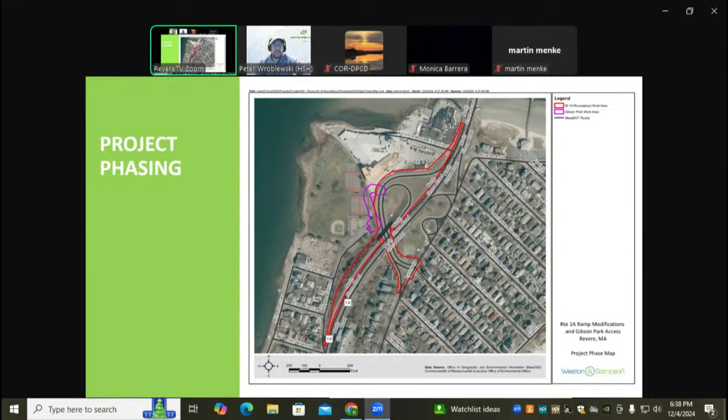This particular project is broken down into two phases. We have phase 1 outlined in red that compose the roundabout component of the proposed project. We also have phase 2, which is the Gibson Park access component of the project, which is outlined in purple. I will then turn it over to Peter, and he's going to give you a rundown on the phasing, and then we have some plan sheets to show you.

Thanks, Devin. Can everyone hear me okay? Yes. Okay, thank you. So phase 1, as Devin mentioned, that is the roundabout component of this project. 100% of that project is within the state right-of-way, and we've been coordinating very closely with MassDOT because it's all on their property to get their appropriate permits and go through their design process and environmental process to make sure we're meeting their standards, as well as MEPA's and everyone else in the area.

We previously submitted a combined set of plans, 75-100% set. We're considering that as 100% at this point, and we resubmitted that earlier this week. Phase 1 of this project, again, is just that roundabout infrastructure, and that's within the state right-of-way. And a secondary component of this project is critical to the access to the development at 22 Whitin, Gibson Point. There is a driveway which is going to be established as emergency access only for this phase of work.

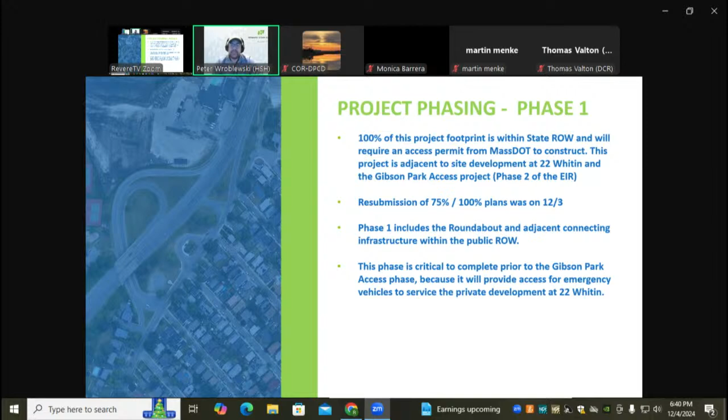If you go on the next slide. The second phase, this is Gibson Park access that Devin mentioned. We're approaching a preliminary design. We have those plans at, we're feeling confident, 75% design complete. We're waiting to file those officially until we get comments back on the content from phase 1 by MassDOT. However, the condition of those plans was submitted to MEPA in this filing, and your board will all have access to that. If you'd like to see those, they're available.

We did additional traffic studies on top of the functional design report that was included as part of phase one, which is a standard MassDOT traffic operational report. This was a subsequent report that MassDOT requested that we run to determine what, if any, impacts would come from building the access to Gibson Park and tying it into the roundabout. We did a full analysis with new traffic counts, and our report showed there would be no negative impacts to traffic volumes or safety in this area by connecting the roundabout to Gibson Park.

The alignment that you'll see soon in the next slides is the concept alternative that's preferred by all. I'm sorry, I'm still finishing up those last two bullets here, whoever's doing the slides for me. And there are a couple of concepts. Those concepts, we already know they're not viable, so we're not pursuing them any longer at this point, but we did go through an assessment of what was included in those concepts in terms of planting areas and number of trees and different environmental factors, as well as geometry and safety from a traffic operational standpoint.

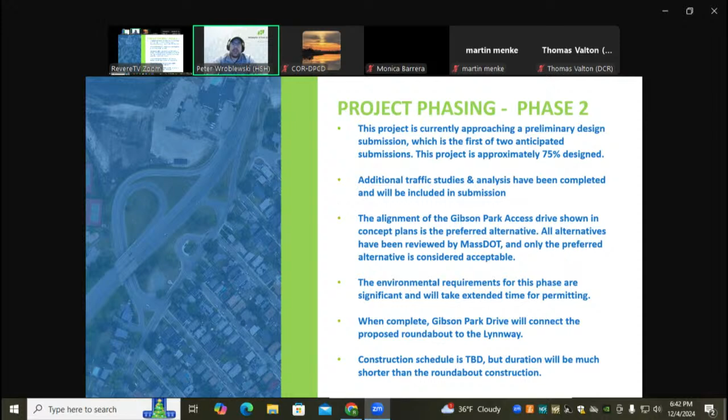It would be triggered by this action, and so in case that is what ends up, we're planning on that. We're counting on that being included, and if it ends up being the case, then this will take a lot longer to advertise this phase of work. However, the construction duration for this phase is significantly shorter than phase one. Phase one, we think it's about a 2-year construction period, and phase two, we think it's about a 2-month construction period. So there's a good chance that we could get this advertised and constructed in line with the phase one project. On the next slide.

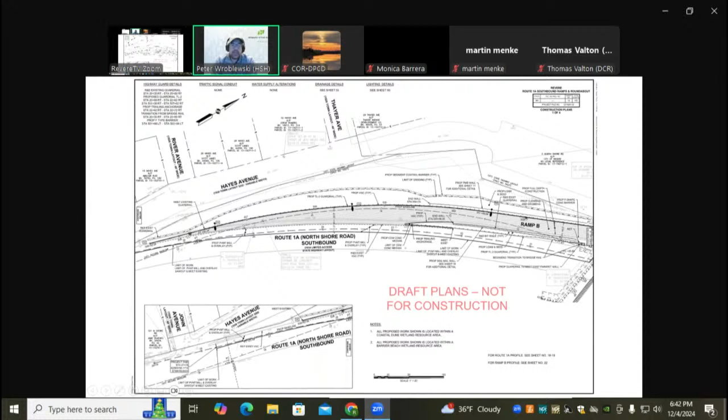So this is the first portion of our 100% plans for the phase one roundabout, and you can see this is the southern limit of the project. This is where it ties into Route 1A southbound. Our ramp B is a new on-ramp that, if you go to the next slide, you can kind of see it extends from that roundabout, which is in the center of Gibson Park, and then the 22 Whitin development, and then Route 1A are the three kind of boundaries that this tight roundabout fits within.

A lot of design went into this to meet these criteria. We had significant geometric limitations. We couldn't move it horizontally very far in any direction because we did not want to construct any roadway facilities within the limits of Gibson Park. We had vertical constraints because of the tight window to merge ramp B onto Route 1A southbound, limiting our ability to raise that ramp.

However, the Gibson Park Drive that you see on the bottom part of this diagram is the underpass under Route 1A, and we also couldn't raise that elevation because we didn't want to reduce the clearance for any trucks that might be using Gibson Park Drive. Many of you may know there's a subsequent large-scale project that MassDOT is undergoing with the General Edwards Bridge. We've been in coordination with that project group, and none of the work we're doing will be impacted by their project. We're going to make sure they can be concurrent. So that was another big consideration that led to this design option being selected.

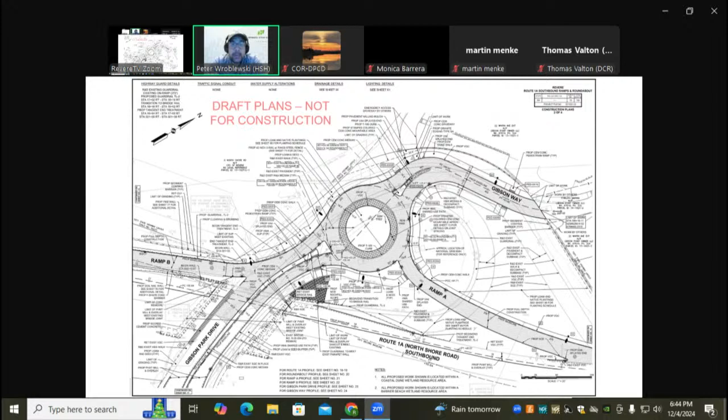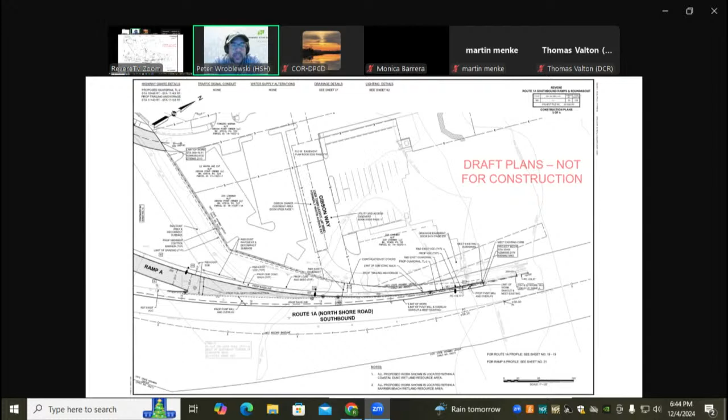And if you go to the next slide, that ramp A that continues, it's essentially going to be the same, slightly different, but the same beginning point for ramp A, which is the Route 1A southbound off ramp. And if you go backward one slide, and you can just kind of envision going down that ramp, you'll see that roundabout is the new intersection that connects all these points and ties into the Lynnway. And if you go forward a slide, this is the intersection at the Lynnway.

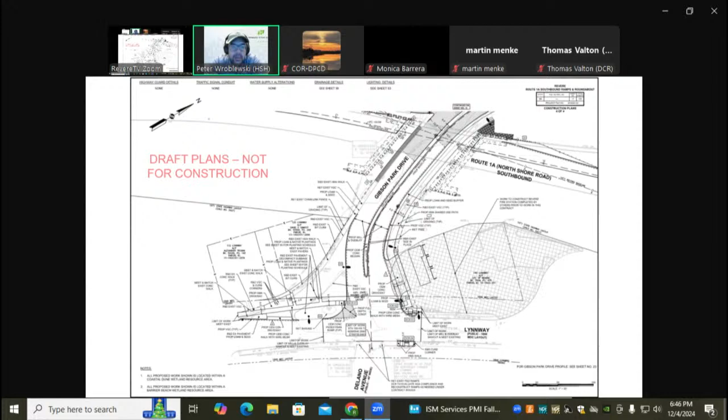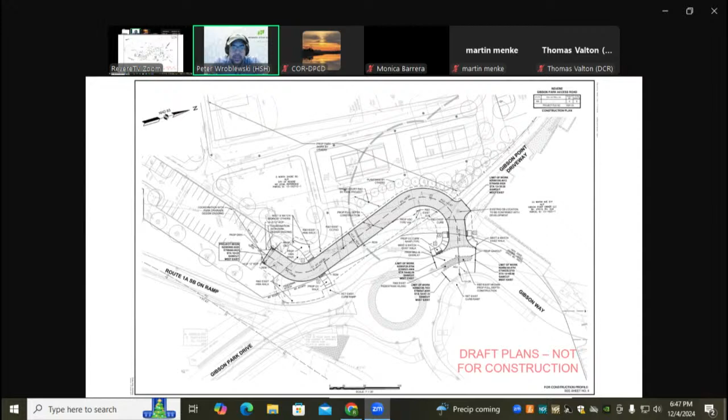On the next slide, you'll start to see some of the other alternatives that we considered.

So I kind of mentioned this, I don't want to be redundant here, forgive me. It does create a lot of access. The benefits of the roundabout are it creates this access, it's minimal traffic impact, and the shared use path is a nice new feature for multimodal accessibility. We showed you where that fire station is. The response time for emergency vehicles to get to this side of Route 1A and to residents on the other side is really critical. It reduces response time significantly compared to otherwise having to go into Lynn, pull a U-turn, and come back down the highway. Revere Fire Department has a brand new fire station and a brand new fire truck with a long 50-foot ladder. We got their truck details to make sure we coordinated with them that their big fire truck could navigate through our roundabout and make that access safely.

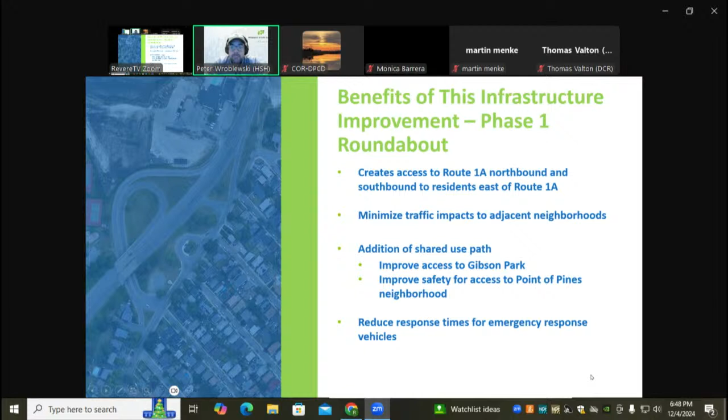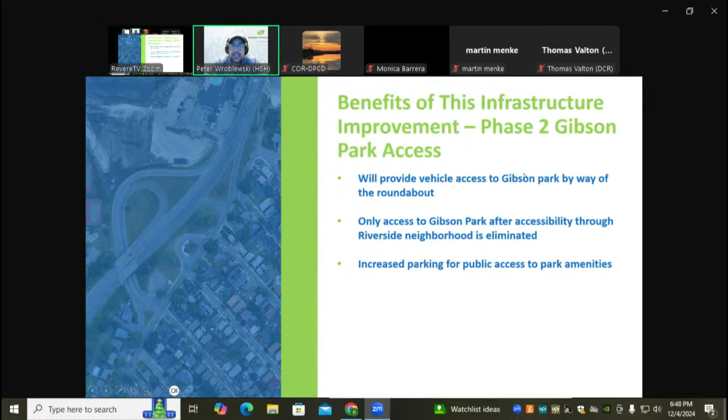Phase 2 - so this is again just continuing that access. As part of the Gibson Park Improvement Project, access to Gibson Park is planned to be closed off on the southern limit, and this will be the way that people can access the park. So it's a pretty critical feature.

Devin, if you want to go through the environmental impacts here. Thanks so much, Peter. So the three wetland resource areas that would be impacted as part of this proposed project are Barrier Beach, which is the entirety of the Point of Pines Peninsula, and similarly Coastal Dune - those two overlap, so any impacts to one will have equal impacts to the other. And then a good chunk of the areas within the 100-year floodplain. In this area, the 100-year floodplain is located at elevation 10, which encompasses most of the peninsula.

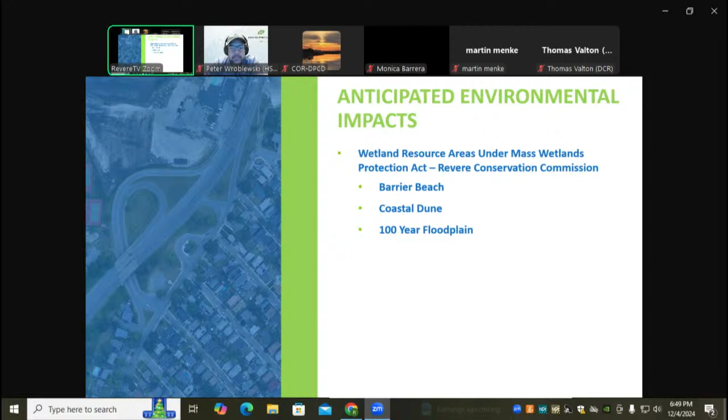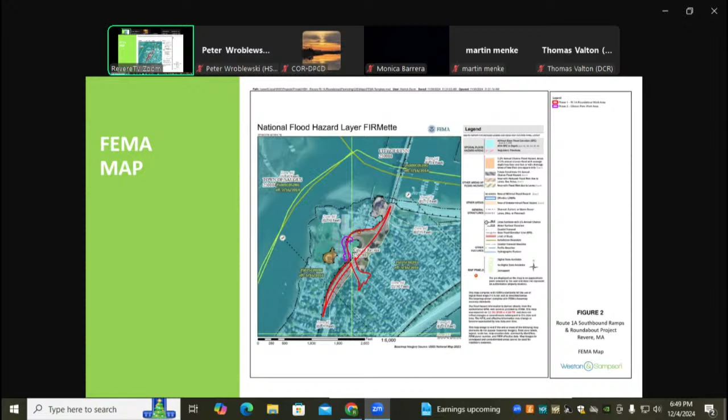If we could go to the next slide, please. This is the FEMA flood map to give you a general idea. It has been tweaked on the plan set to match real-world contours, but this is the map that FEMA provides just to give you an idea. So everything in light blue would be within the 100-year floodplain.

Next slide, if you'd please. This is a summary of the environmental impacts. We have it broken down into Phase 1, Phase 2, and cumulative. I'll just read through the totals that we're expecting for the cumulative, but happy to go through any of the others you may be interested in. For land subject to coastal storm flowage, we are anticipating a total impact of 86,390 square feet. For Barrier Beach and Coastal Dune, we are looking at a cumulative 207,114 square feet of impact.

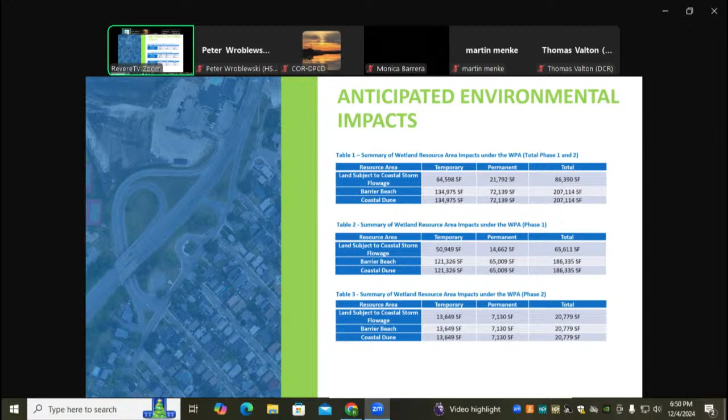One thing we had heard during our MEPA EENF submission from some of the agencies, including CZM, is they want to see benefits to the coastal dune. So something that has been incorporated as part of this EIR submission is just over 44,000 square feet of dune plantings. If we go to the next slide, you can see some of these areas highlighted where we're seeing dune planting. So where it used to be just kind of sparse grass adjacent to the highway layout, we're now going to have dune plantings.

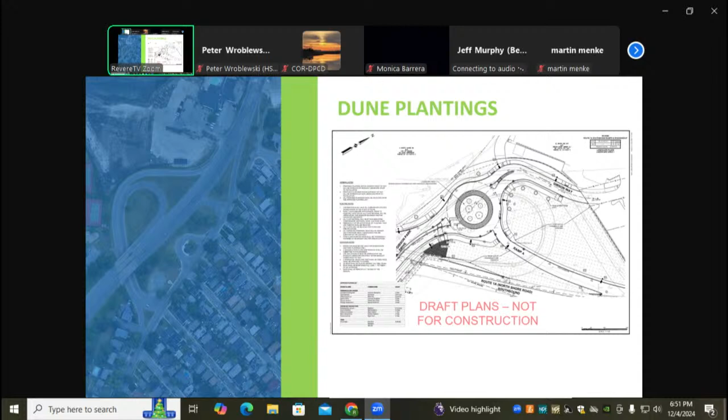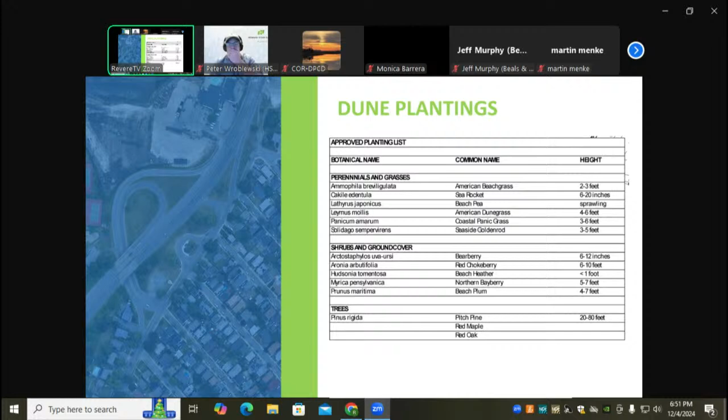If you go to the next slide, we've taken those planting lists from some of the CZM recommended lists so that we can have something representative of what the area would look like if we didn't have quite so much development—a little bit more of a natural dune situation to provide some nice stability to those exposed areas where it's a little sparse at the moment.

And then we'll play ping pong and I'll turn it back to Peter so he can talk a bit about traffic considerations. Thanks, Devin. So as I mentioned, the proposed roundabout is not going to increase traffic volumes on Route 1A. We've done a significant traffic analysis and used a background growth rate, compounded annually, to account for any developments in the area.

We coordinated with the city of Revere, but also with the city of Lynn, to talk about future developments. There was not a significant increase in traffic flow anticipated on Route 1A as a result of this new construction, either phase 1 or phase 2.

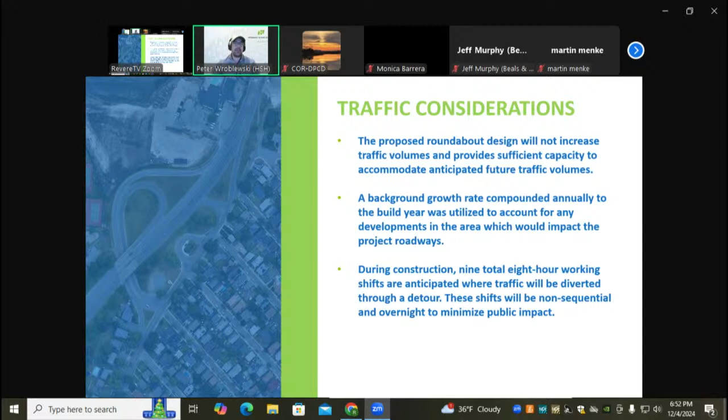In terms of traffic control during construction and the impact to the traveling public, there will be 9 total 8-hour work shifts where people will have to be diverted via detour, but those will be overnight and non-sequential—one night of road closure at a time. They'll typically start around 8 to 10 p.m., close the road for 8 hours to minimize impact, and try to offset each closure by at least a week or two so the traffic impact is minimized during construction.

Next slide. Now I'm going to talk about some of the alternatives we considered but did not pursue further for construction. The first is the 2 offset 3-way intersections. This was the most seriously considered alternative out of either phase 1 or phase 2. You can see it's very similar to the roundabout alternative, the main difference being that the roundabout alternative is a roundabout intersection, whereas this is 2 offset 3-way intersections.

From a geometric standpoint, this project fit in that area, but one reason it's not viable is that the on-ramp—it's tiny in this presentation, but envision the southbound on-ramp, ramp B, in that previous roundabout slide—requires an 8% grade, which is steep. To make an 8% grade acceptable for merging traffic, you need a certain length of taper. Because this road starts from a stop condition, that space isn't there within that geometry, as it is in the roundabout. The roundabout has sufficient room to make this work; the 2 offset 3-way intersection does not, so this is not a viable alternative.

We discussed this, analyzed it, provided a report, and discussed it with the city of Revere and the state. MassDOT agreed that this is not a reasonable alternative and therefore it was eliminated from consideration.

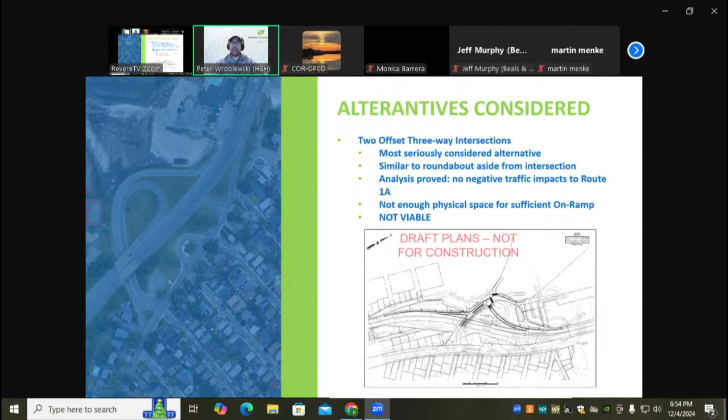On the next slide, I'll start to show some of the other alternatives we went through. I want to be clear on these: they are very preliminary concepts we're showing for transparency. They were not fully vetted or fully designed beyond the concept level, because they were determined to be invalid pretty early on.

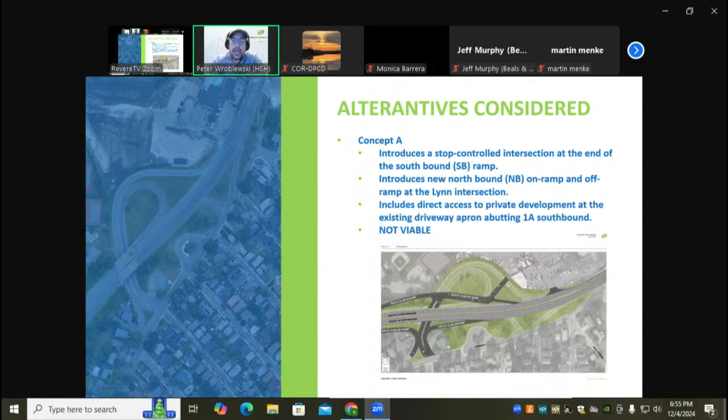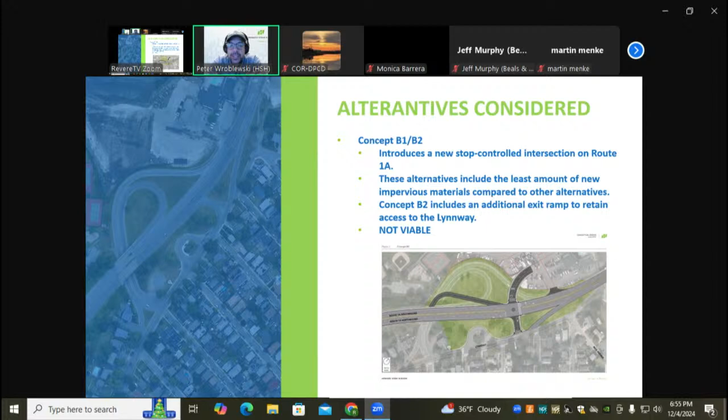And the next alternative—again, this includes a stop condition on the highway. If you click to the next slide, it's very similar, also including a stop condition on the highway with that off-ramp. We don't want to put a stop-controlled intersection in the middle of 1A, so this was pretty quickly eliminated as a consideration. If you go to the next slide.

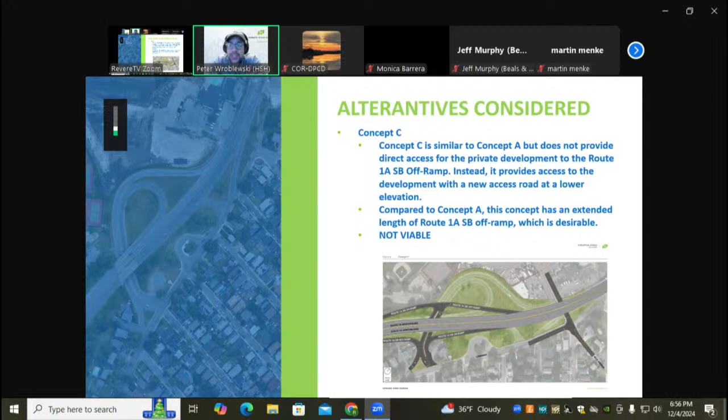On the next slide, this was pretty similar to the existing layout. I know this was an alternative that was favored by a lot of people, hopeful that it could be the selected concept. We pursued this with our design analysis and discussed it with MassDOT. This was not an acceptable alternative for a few reasons.

One, it does not provide emergency access into the building at that secondary entrance for Gibson Point. And secondly, the intersection required there, if you look at the off-ramp going onto Route 1A southbound, is a very short off-ramp, not enough stopping distance, which might result in some queuing on the highway.

Thirdly, MassDOT is not going to allow a condition where there's an intersection tying into a concentric on-ramp, off-ramp situation. It causes a lot of challenges for merging speed if you're accelerating from that stop condition, similar to what I talked about with the two offset three-way intersections. That's a challenge for traffic traveling southbound, and it's not a condition that allows for easy access—it would just create more congestion from that intersection. So this was also not a viable alternative, and we did not pursue the design beyond the concept level.

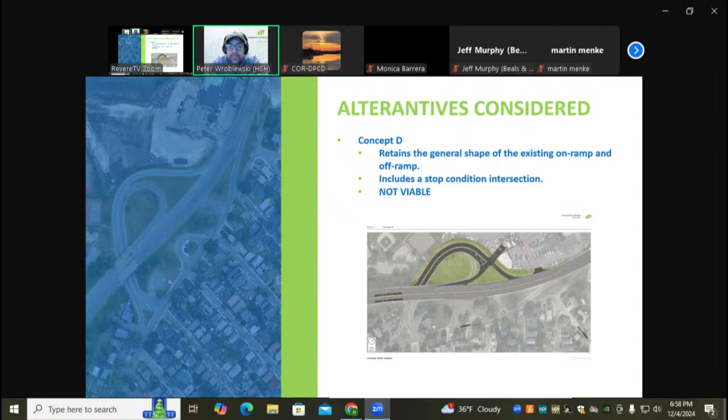On the next slide, I think Devin is going to go through some of the more design processes. Is that correct, Devin? Yeah, I can take it from here.

We're just about done, we've got about 2 slides left, but we just wanted to give— Thanks for your patience. Thanks, Peter. We just wanted to give folks an idea of where we are in the process.

To reiterate, we have already gone through the MEPA EENF process. On Monday, we submitted the SEIR. That will go into the environmental monitor on December 11th, at which time it will be available to be downloaded off the EEA website by anyone who so wishes. There's also a full copy that has been brought to the Revere Public Library for anyone that may want to look at it.

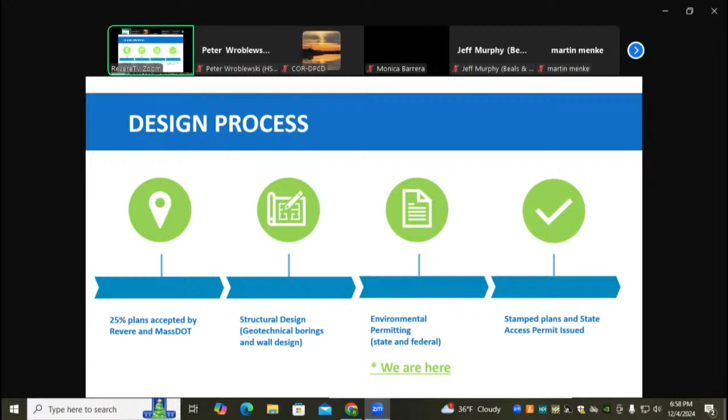If we could go to the next slide, please—just some more contact information for folks that may want to look at the materials, submit comments, or ask questions. We've got Julie's email address, as well as the website where this will be uploaded and posted December 11th when it goes live in the monitor. If you just search the EEA website for Route 1A, it's the only thing that comes up in Revere, so it should be pretty easy to find, and we welcome and encourage all comments.

And we'd love to turn it over for any questions that you folks or the public might have.

I would just make one small suggestion for the future. I know you said there's a copy at the Revere Public Library. I would highly recommend there being a copy for every single commissioner on this commission whenever you present. It was tough to see from here, and it was tough to follow.

So there's a copy of the actual SEIR at the Revere Public Library, the full report. We can send you the link for the SEIR after today's meeting, so you have it. It's a pretty large file. But we can send you a link for that, and we will have this on our project website under the community development page for anybody to look at, but we can send this to you as well.

I also want to note, because this is an environmental justice area, we have notified at least 7 or 8 different communities in that environmental justice population. There were mailers sent out to abutters of the project living within 1,000 feet. We're not required to do that—it's 300 feet from the project area—but we extended the limits, so residents living within that area received a notification of this filing. We're doing everything we can to make sure residents of Riverside and Point of Pines are fully aware about this notification and filing.

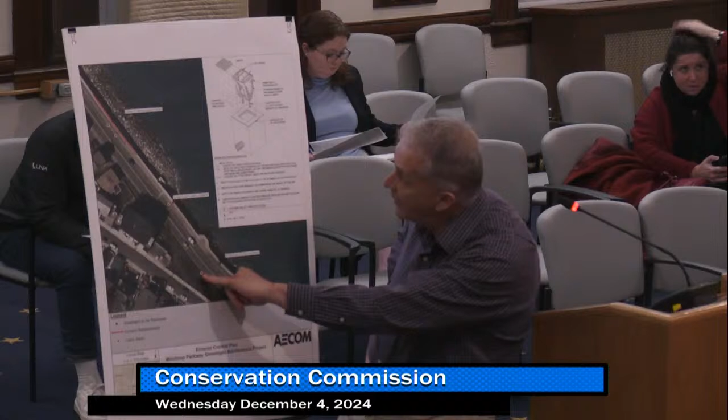Like I said, the work's all gonna take place in about a day. There'll be nothing stockpiled overnight. The only threat of erosion has a very simple solution: just don't work in the rain. And where a project's only gonna take one day, they don't plan to work in the rain. But just in case, we are gonna put silt sacks in the catch basins that are immediately adjacent. We have what's probably a 5.5 or 6 foot high wall separating the site from the ocean, so there's no threat of sediment getting into the ocean.

And then they have some repairs to do at the bases of the streetlights themselves. Which you won't have to excavate or do much with? No, we won't. It's in the buffer zone. And it is partially within land subject to coastal storm flowage, but because of the seawall, it's designated as an area with reduced threat of flooding.

So instead of excavating and putting it on the street, you can have like a dump truck or something like that you can load it into that can actually drive away, especially seeing as how you're gonna be taking it out. Yeah, so there'll be live loading, because the sidewalk's only this big. They don't want to go out into the street. That just creates a whole other list of hazards you just don't want to deal with.

Yeah, so they're looking to live load and keep traffic moving throughout the process. And like I said, it's a day for the excavation and the backfill. Then they'll be out doing the street light repairs there, the lamp post repairs. And I'm not sure, they might get 2 done in a day or 1 a day. Yeah, it is pretty dark going through that little stretch over there. I agree. Any questions from the commission?

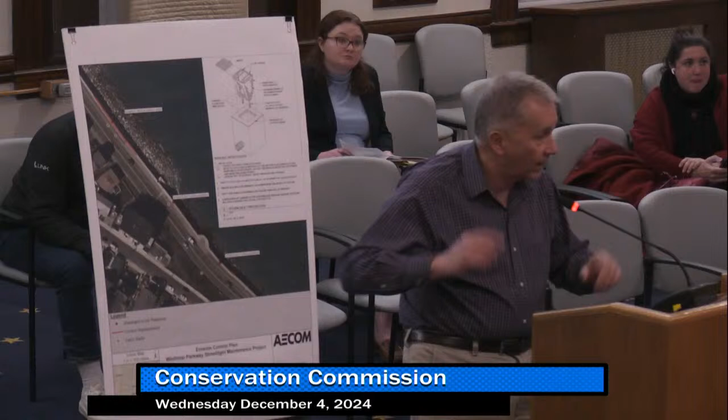Mr. Chairman, excuse me, hi. Yes, sir. Will this block either one of the travel lanes or car access? It will partially block one, but there'll be traffic that'll be allowed to pass. I assume there'll be a police detail there. There will, yes. Yeah, because that's kind of a bad turn there, it's a very busy roadway. You've got the seawall coming up too, that will reduce your visibility as you're trying to take a turn, so there will be adequate traffic control.

Thank you. I live one street over from that, so. Oh, you do? I use that road all the time to get to Winthrop, and it needs it badly. I'm wondering, how soon will that be completed? The very day they can. If it's not raining, the day they're authorized to go work, they're going out to work. Okay, great. Because I'll drive down there and just think, hey, this is really dark here. Why is that? So it's good to have this meeting and know why. Thank you. Any other questions?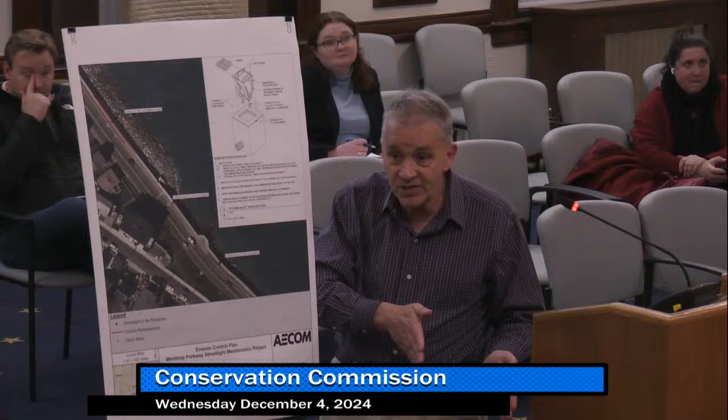Just to make sure it doesn't get done on a Thursday or Friday, just in case you run into problems, for the erosion control, so maybe like a Monday or Tuesday, so it doesn't extend into the weekend. If there are issues when they start digging, they can immediately just backfill that trench right away and compact and be fine with it and just walk away. It will not interfere with traffic on the roadway. It's only gonna be about that wide. So they'll be able to leave the silt sacks in for quite a length of time before they have to take those out and clean them. Okay, that's fair, thank you.

Any other questions? Are you requesting a negative determination? Yes, we are. Okay. Any questions from the audience about this? Nope. I mean, you are excavating, but because of the retaining wall, it is not going to impact, and you'll be live loading, so you won't really have dirt on the ground, and you'll have plenty of erosion controls. I would be fairly comfortable calling for a negative determination of applicability to the Wetlands Protection Act. So I would call for a motion for that.

I'll make a motion of negative. Second. All in favor of a negative determination? Aye. Aye. Aye. Aye. Thank you very much. Thank you for your time, I appreciate it. Appreciate it.

All right. Next up is a notice of intent, DEP file number 0610831. This is 12 Pearl Ave, proposed permeable retaining wall around the yard to protect their home, basements, and surrounding areas. We were out here previously for a notice of violation, which turned into this. Are they here, or do we have another representative? They are here, they're on Zoom. Okay, so I'm gonna unmute them.

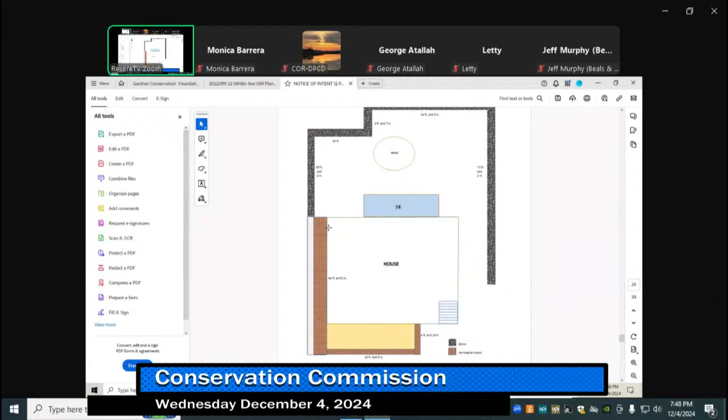They've revised their plan to include the swale that they're proposing in the back of the yard. And they changed the brick in the front to permeable pavers. And then the yellow, I believe that is going to be open. That is going to be grass or some sort of planting bed, and the wall that's in the back, Joe, is all going to be permeable retaining wall. Not really sure how they're going to do that, but that's what some of my questions would be. And then in the back, they'll have some sort of French drain for water retention on the property.

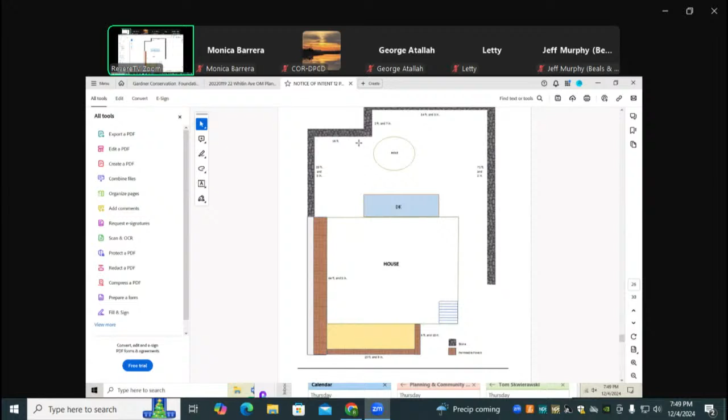Sorry, let me make sure I open up the hearing for this. Anyways, I'm not really sure how we want to proceed with this. Do other commissioners feel comfortable with this format, or would you rather have them in front of us to understand what is happening? I know that we're not all bilingual and able to understand what they're saying, and I want to be considerate to those that are not. I would just say that, obviously I'm having trouble with the audio issues, number one, but then I'm not bilingual, so that's part of the issue as well.

So I think if they did come before us and did have somebody that was able to translate on their behalf, whether it's through the city of Revere or through themselves, I think that would be beneficial for them, and that way we'd be able to properly communicate questions that we have. And then also if they had handouts for us and being able to answer those questions in real time, it would be beneficial for everybody. That would be my opinion. Yep. Any other thoughts from any of the other commissioners? I got the gist of it, but I can't really see what their plan entails, and I wasn't present at the site visit, so. Okay.

Don't forget that when they come before us with a notice of intent, there's a plan included. Correct. That's what we have to be looking at, and once we approve that plan, they can't alter that plan unless they come before us again. And like I said, right now, I don't know what I'm looking at that I could approve if I wanted to. They have submitted their plans, and they've submitted their revised plans that I've sent to you all to look at.

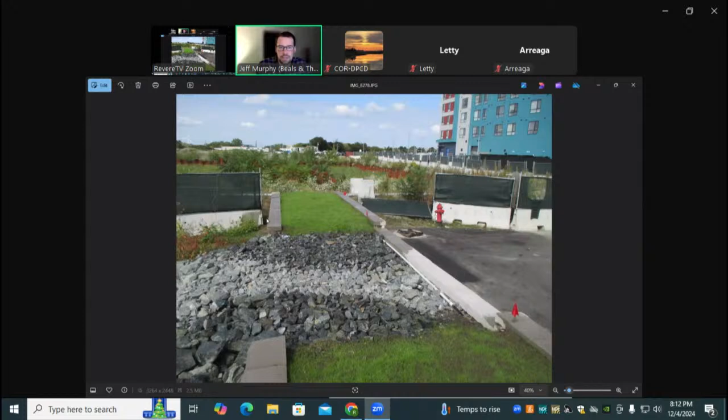So everything is grown in and established. And then all of the various components of the wall and the associated drainage outfall have been completed as well. There's a manhole structure here and then a headwall here that daylights to the wetlands. So are there any specific questions that the commission has?

No, I don't have any questions at this time. I've been out there a couple times now, and I've seen that retaining wall, and it is definitely within spec of what you provided to us earlier. At this time, I'd like to open it up to any of the other commissioners if you have any questions about this retaining wall. Yes, Mr. Chairman.

When was the start date that you did this work and the completion date, please? So I believe the pre-construction meeting was held on March 28th, 2024. So it started, I think, in April of 2024. And the wall was completed, I want to say, late summer, maybe July or so. I don't have a specific date, but I think it was completed in that time frame.

We were out there, I can't remember when our site visit was, but it was pretty much complete. You were just waiting for the grass to establish itself. The stone was already there, and the entire wall was already constructed at that time. So that was pretty much completed in July when we were out there, or was it June? The other question I had was, did you have to cut down any significant trees in that area? I recall walking through some of that area, and it seemed like there was some secondary vegetation there.

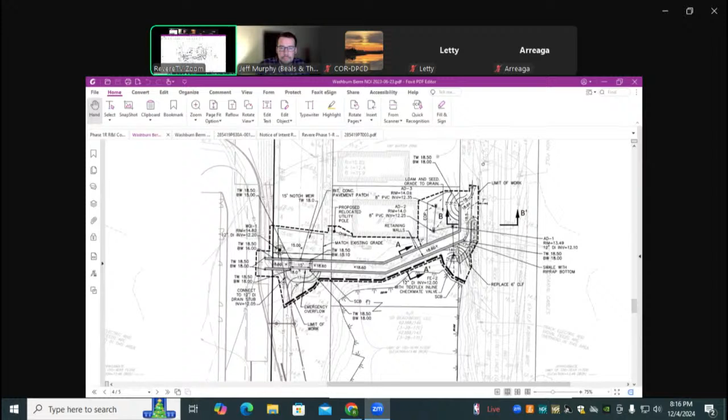Okay. At this time, I would call for a motion to approve this certificate of compliance for this retaining wall at 130 Washburn Ave. I make a motion for the certificate of compliance. Second. All in favor? Aye. Aye. Aye. Thank you very much. Okay, last but certainly not least, DEP file number 0610717, Hugo Rizzuto, 265 Rice Ave, construction of a single-family dwelling.

Good evening, Mr. Chairman, fellow members. I've been planning for this day since October 16th, 2016. Very glad you could share it with me. Mr. Lavalley, you're the only one left that voted on this original order of conditions. I think we've been through 4 chairmen since then, so it'd be nice to have this wrapped up.

So thank you. We were out on November 23rd to do another site visit. We submitted a plan showing all the as-built features that have been occurring on the site since the summer. We also submitted a letter stating that the plan is in substantial compliance with a few minor differences noted, some of which I think the Commission's already aware of, that dry wells were put in and some additional stone walkways were put in.